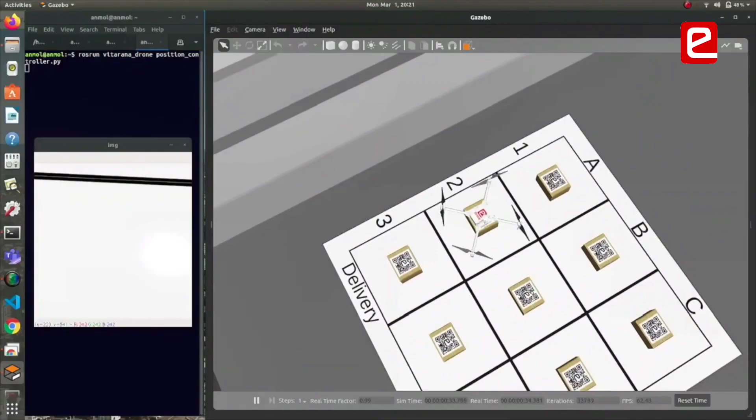eYantra teaches practical robotics and engineering skills through its competition themes. This year's themes were drawn from the domain of Industry 4.0 problems. Since COVID lockdown made it difficult to distribute hardware, eYantra made COVID-friendly themes through its use of open source simulation technology. We have yet a very interesting control systems based theme here for you.

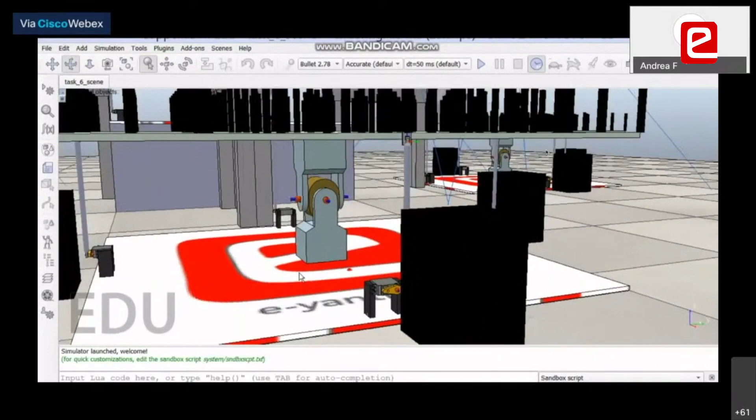It's called Nirikshak Bot, which is an inspection bot. So this theme is based on a balancing bot concept where we teach you control systems and stuff like that. The idea is inspired from an Industry 4.0 scenario where we have to have an inspection bot, and that inspection bot has to check whether some balls pass a quality test using a variety of tables.

We outlined the problem along with an objective formula for grading a finished solution. Students were taught all the skills required through project-based learning in competition mode over a period of 6 months. Teams uploaded a video of their final run along with an account of their experiences in reaching the goal. At the finals, the students faced a viva by an IIT Bombay faculty jury. We are privileged to have with us some very interesting members of jury here.

We now highlight the stages of the competition and detail the skills learned at each stage. The theme is set in an industry manufacturing ball balancing platforms. The goal is to make the balls traverse through the maze on defined paths within a stipulated amount of time in order to determine the quality of the platform manufactured. The platform which is able to achieve this objective is termed as OK tested.

Now let us look at the learnings of this theme. Through this theme, we tried to teach robotic simulation, image processing, control systems, multiprocessing/threading, path planning, and Python and Lua programming to all the participants. The arena consists of 4 ball balancing platforms, T1 to T4, where teams will generate mazes on top of them. Adjacent mazes are connected to each other using conveyors B1 to B4. At the end of the mazes, there are collection boxes CB1 to CB3.

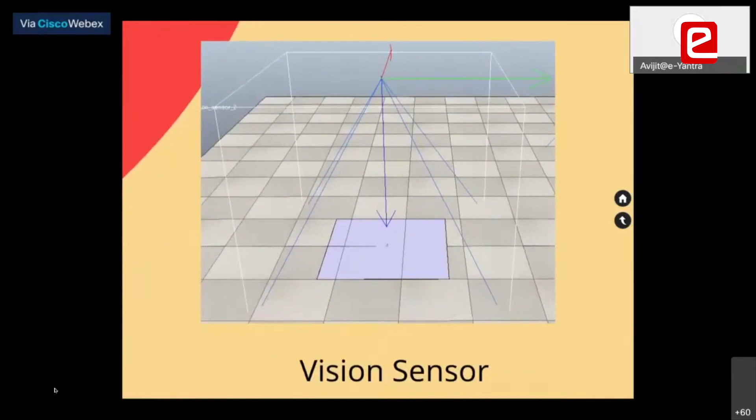Each platform has a vision sensor on top of it. It is used to determine the location of the ball. This is an example of a 2DOF ball balancing platform. A cross-platform app helped in auto-evaluating the task at the participant's end. In the first page, teams had to enter their team ID and path of the workspace where their codes were present. In the next page, a randomized sequence of the balls was generated. This sequence, when transferred to the simulator, that is CoppeliaSim, reordered the position of the balls in the ball dispenser.

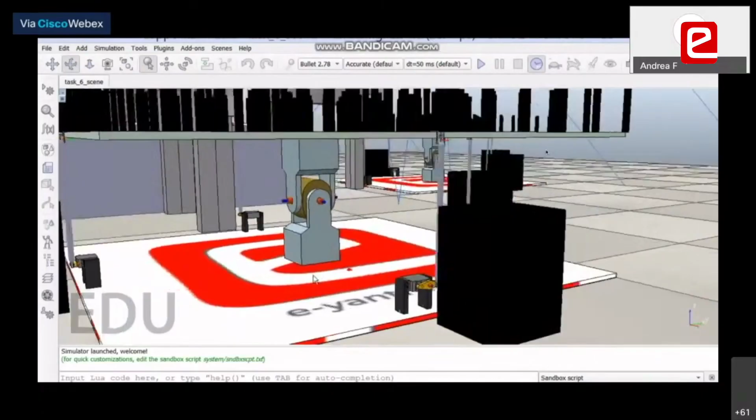At the end of the theme run, the value of various parameters were listed for the teams and an encoded text file, gibberish to the participants, was generated, which was submitted on the portal. The eYantra competition trains participants in complex skills by breaking them down into subtasks which we lead you through systematically. In the Nirikshak Bot theme, we design ball balancing platforms with mazes on top such that the multicolored balls negotiate them in a given time, ensuring the platform's quality.

However, there are a number of challenges. First of all, we generate the mazes. So using image processing on the input maze images, we construct these mazes on the platforms. We then identify the color of the ball and determine the drop location for a dispensed ball. And then we draw the calculated shortest path, and then we tune the PID controller to traverse the drawn path using feedback via image processing of the ball balancing platform.

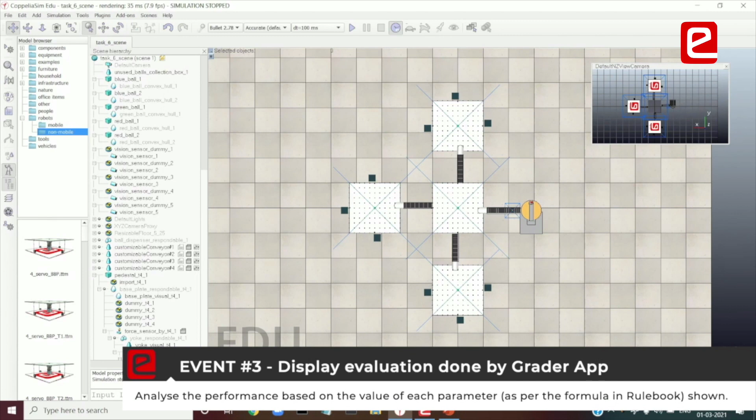Then we continue to traverse the path on the table and deposit the ball in the designated box. Finally, we continue to do the same by depositing the remaining balls. We display the evaluation done by the grader app, and then we analyze the performance based on the value of each of the parameters as per the formula in the rulebook shown.

eYantra has slowly forced me into a person who can work efficiently. We learned how to work as a team and collectively give our ideas and solutions to solve a problem.

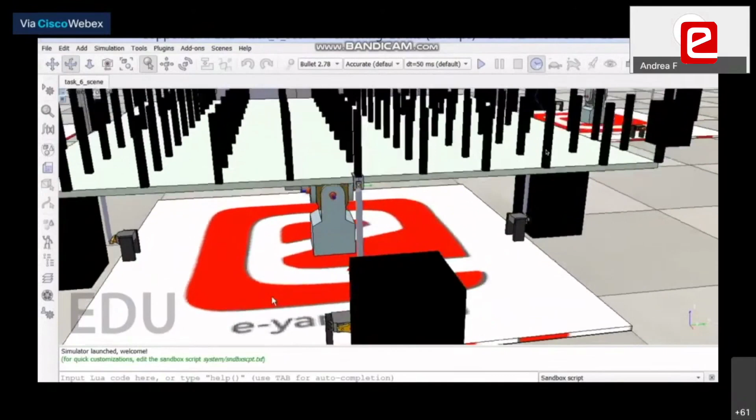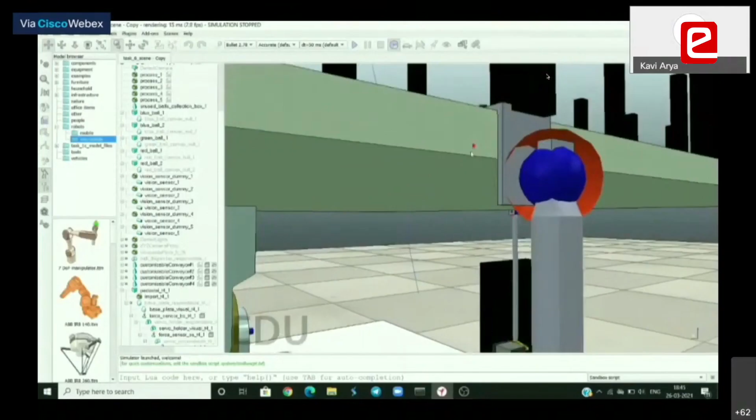When you designed the table, it has hinges connected at the center of the square table. Why didn't you choose the corners? We tried with two servos at first, and then we moved to four servos. When we were trying to use the one close to the corner, the torque was not applied properly to the table. Maybe towards the opposite end, when the ball is not actually close to the L connector, we can see that the actuation is not proper and we didn't get the best output. So when we tested it with the centers, we were able to control it better.

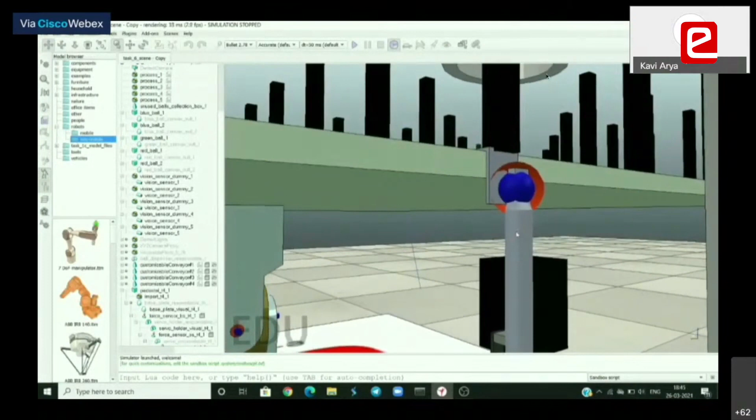The motors which are positioned opposite to each other, on the opposite sides, will have the negative of that angle. So the same PID output will be used, and we are using the negative of that angle so that when this goes up, it will simultaneously tilt properly.

Do you know any principles that you can use in tuning the PID controllers? First, we gave a value to the proportional. Then we saw the graph, and based on what we see on the graph, we increase the D value according to the overshoot. Because with the proportional control, just using that value, we got overshoot. So in order to reduce the overshoot, we started increasing the D value. That's how we tuned it.

The maze table is a square. It's a perfect world. But what if it is a circle? Because as a child, I have played with this kind of a maze which was a circular box where we had to take these steel balls from one part to another part. Right. Where do you put the motors in that particular case? Because you don't have any corners or edges.

We have to divide the entire circle into 3 equal parts and place the motor close to the edge of it, or a little bit inside. That would be fine, but the tuning would change according to it. But the important thing is the motors should be placed at equal distance. But you could have done this also with a square board, right? By having a round rim inside it, where you can hinge it with 3 motors, no?

But I'd like to highlight to these guys that, if you just think out of the box, what you've learned actually is how to design and tune control systems to achieve a goal, right? Think of this board that you're trying to balance as maybe you could put a big chair on it, and you can build a flight or a vehicle simulator where you can get the wheel information or terrain information and keep on moving this thing around to simulate the terrain of an area that the vehicle is meant to be going over, right? That's a possibility. You can build a flight simulator with this. You can build a gaming platform with this.

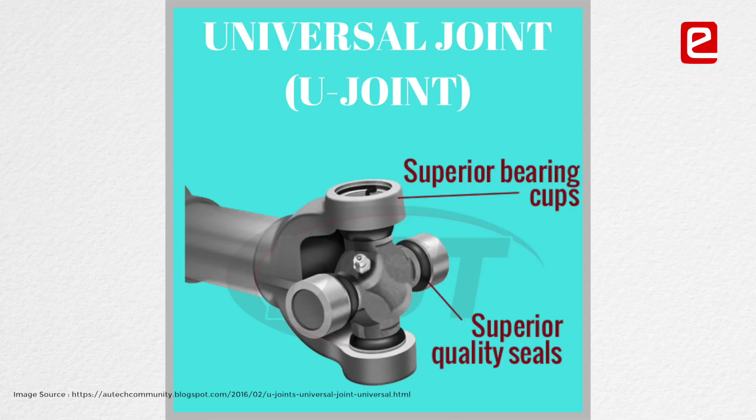Since you have got four joints on four sides supporting the table, can it take the whole load, and why do you need the universal joint? Just remove it. Actually, the top table is of dimensions 1 meter by 1 meter, so the load would have been really heavy for the servo motors alone to balance. Good. But if the rigid board is very light, then you won't have that problem, right? Yes, sir. That's correct. We actually had this thought, should we use a universal joint or not? Because in CoppeliaSim, if we reduce the mass of the top plate, then the universal joint is not required.

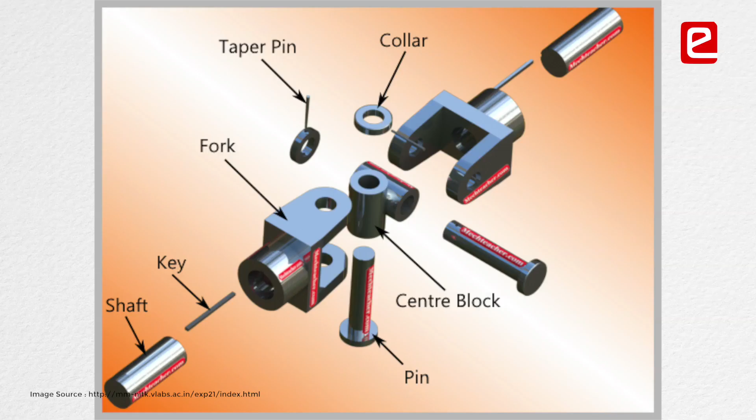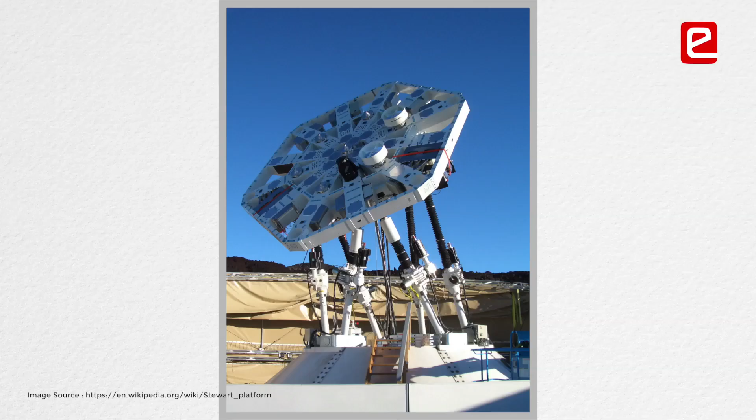But at that point of time, we also wanted the students to make their design such that they can build them in reality as well if they are planning to. And not using the universal joint will severely increase the torque on the motors and reduce the stability of the design as well. So we had given them all these parts, and they had to assemble it. There were certain restrictions on the number of parts, and that's the reason they used the universal joint.

This is a wonderful Stewart platform system, and I have just put that into the chat window here. This Stewart platform is supposed to do the 6DOF manipulations of the table, and this funda is used in rocket stabilization. It's a very challenging control problem, and I should appreciate the problem designers here, that they have brought down the problem to a level where it can at least be addressed through PID.

This is an interesting point, that if you remove that central pivot, then you can adjust the height of the thing. And this is a nice idea, that you raise the thing to capture the ball and then get on with the whole thing. And plus, it would give you much more mobility. Yeah, that's right. But at the same time, the degree of freedom will increase and the complexity of the problem increases. Yes.

Generally, what happens in the competition, because of the shortness of the time, in 6 months from beginning to end, right? They have to race through it. They do jugaad, they make the thing work and come to the finals, right? But in the process, especially at this point, when they are faced with the jury and are asked about the deeper understanding of what they've done, I'm sure it sensitizes them to the whole notion of theory, right?

What is the theory behind all this? What is the systematic way of making a choice? Rather than, ye chalta hai, so let's just run with this. How to explore the various options? Is there a better way to do it? We often find that teams begin to start thinking about these things here. Ability to understand the problem and try to put things together to make things work is important.

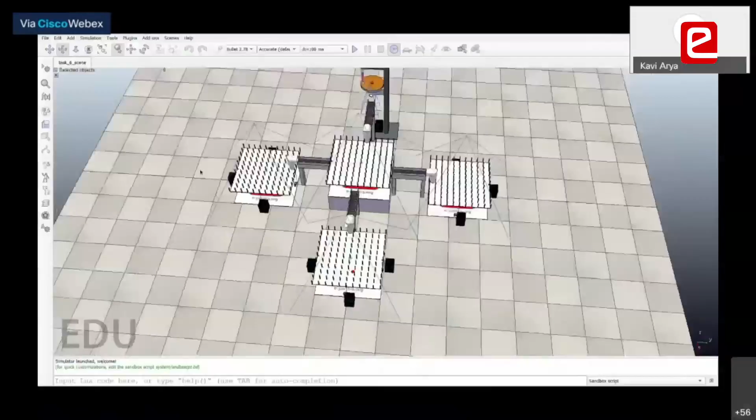As you must have seen, this would have required you to model a little bit of mechanical systems, including different kinds of joints and members. Also deal with a little bit of control theory, a little bit of 3D geometry in order to adjust for camera view to actual physical positions in reality. Then there were some computer science algorithms. So you see, a problem like this tells you that problems don't come in electrical engineering or computer science or mechanical engineering. Problems are problems.

And one of the banes of our current day education is that we only teach one discipline. Whereas this is your chance to see that the world is more integrated than that. And we should have much wider thinking. We should be able to think from first principles and be able to create our own solutions. And that you have been able to do this is commendable. So that is my first point.

Second thing I want to say is, most of the solutions have been done. You've been given certain recipes. There is one kind of controller called PID controller, and you are given this simulator which tells you how the table behaves. Actually, there is a lot of theory that goes behind this. So as Professor Kavi Arya said, we learn to do things by jugaad, but that arouses our curiosity as to what goes behind these things. And let me tell you, at some point, jugaad stops working and you have to fall back on the science behind these things.

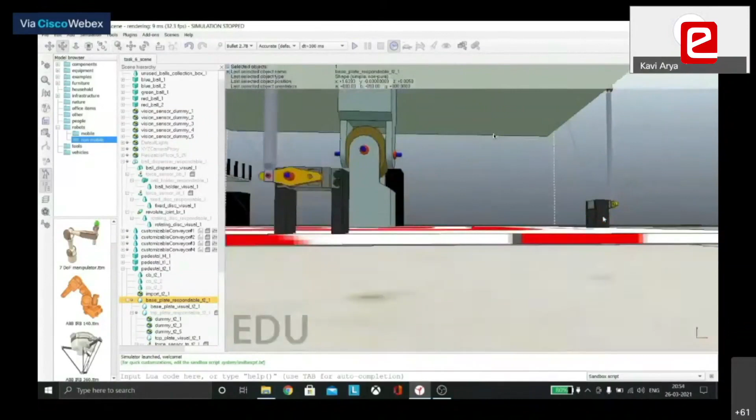There is a lot of physics that goes into modeling of the rolling of the balls on surfaces. There is the table. There was this talk of what kind of joints support those tables, whether they are springs, whether tables have rigidities. Also, balls may not be perfectly spherical. Their masses may not be perfectly fixed. When you manufacture balls, they come with a certain amount of uncertainty. So actually, you have to control systems under uncertainty and disturbance.

And that is one thing that sometimes doesn't show up in simple simulations. And the real world is much tougher than what you simulate. Simulation is your first cut to the problem. So I would like you to appreciate the difference between simulation and real life. When you go to real life, you will have to build what is called a robust controller. And for that, you will need to understand a little bit deeper mathematical aspect of this, the theory behind the kind of systems that you are building.

Third thing that I would like to tell you is that you should have curiosity about, suppose this simulator was not there, and you have to write down mathematical equations which tell you when you tilt the board by this much amount, how will the ball move? There will be simple laws of motion with some geometry thrown in, which will let you move this. But soon you will find that those equations get completely out of hand. You have to discover interesting ways of approximating the problem to solve it.

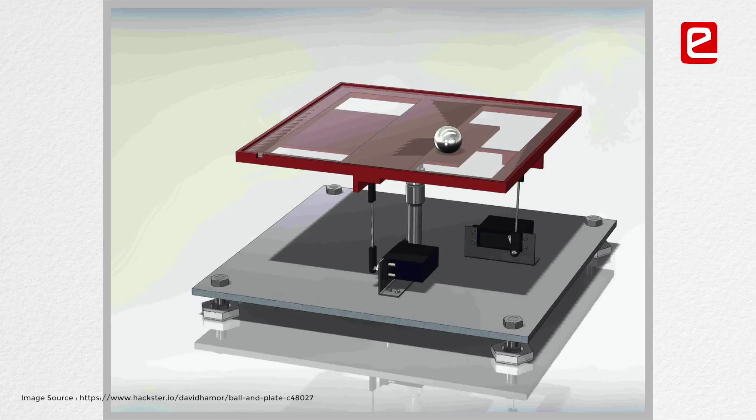So there is considerable work that is required here. Your mentors have done all this hard work of modeling that physics. But if you actually try to mimic that physics, you'll find these ball balancing table systems are quite complicated. It's a nonlinear system. This is what I would like to say. And if this problem has aroused your curiosity, try and read some papers around ball balancing tables. You'll find some interesting stuff.

You pointed out the limitations of jugaad. When you reach the limits of jugaad, that's when you start to need to appreciate theory. It's very heartening for me to see that even a second year student who doesn't have much of an exposure to so-called engineering is still enthusiastic to participate and learn from this exercise. And that is very, very important, because the earlier you start, the earlier you raise your curiosity so that you can learn and go far, far higher.

When you are sitting with a particular stream or a design or a curriculum, you only get that particular perspective. But when you start interacting with other people, other disciplines especially, you get a perspective which is very different from what you are doing or what you look at from a limited perspective. So that is also very interesting for me, that I could see people from physics to electrical engineering to computer science and control systems who are all part of this particular exercise. This is very good. You should take this as a starting point or an exercise to go out and explore yourself in the world outside with real examples.

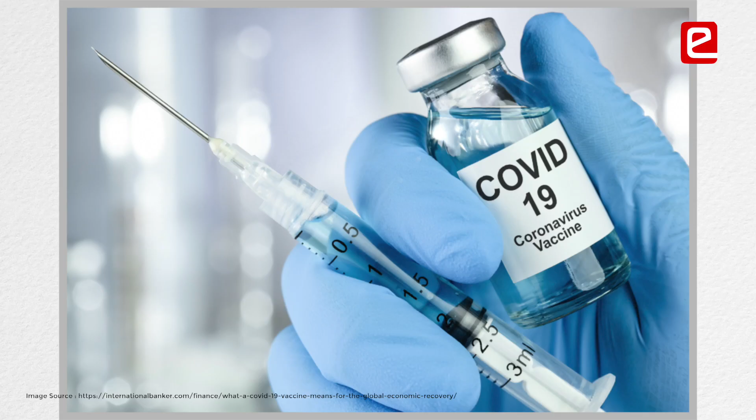See, one of the things that I would like to mention here is that if you look at the current scenario of COVID and the pandemic, the most important thing that everybody talks about is the vaccine. Now, if you think about this particular vaccine, these are vials of liquid filled in a glass bottle, which are produced in hundreds of millions in quantity. And if you look at the production plant, it really is amazing to see these bottles going on a conveyor belt or a chain in an extremely high speed fashion.

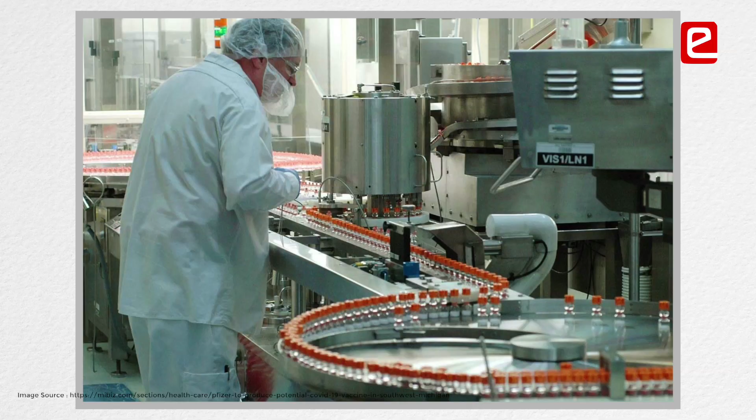Now, if you take this example of a maze table, and if I want to extend this logic to these vaccine vials going around these assembly tables, suppose one vial, because you're talking about a mass, has got 2 ml less, so that the weight is less, it immediately has to be flagged and then moved to a different section of the maze table. So you can look at this maze table as a starting point for you to explore various other options.

You know, people talk about self-driving cars these days. So if you're going to be sitting in a control station and say, okay, I'm going to let my car navigate through the maze of, for example, the Bombay city traffic. How am I going to accelerate and decelerate? Where am I going to take a turn? And how am I going to reach my end point? So this can also be extended into a sort of maze table. There are plenty of real life examples that you can think of. And I think you should take this as a starting point, learn the deeper physics and the science behind the whole thing, and start using it in reality.

Very nice observation that this is the starting point. And the great thing is that they've reached a starting point. Typically, the education system doesn't deliver them up to this starting point where they can actually do something cool, right? So we feel that now they're at least at a point where they can do something very real, and then the journey starts. In design, we always emphasize the importance of learning by doing.

So unless you do things, unless you try things, the learnings are very different. And you should never be afraid to try things, because failures teach you more than just the success. So my advice to all the students is test it out. It's very different when things are not theoretical. What is commendable here is what we have been able to achieve in the pandemic situation as well, from the problem design to reaching out to the students, and from the contestants' perspective, how they formed the team and how they have achieved it in the e-learning mode.